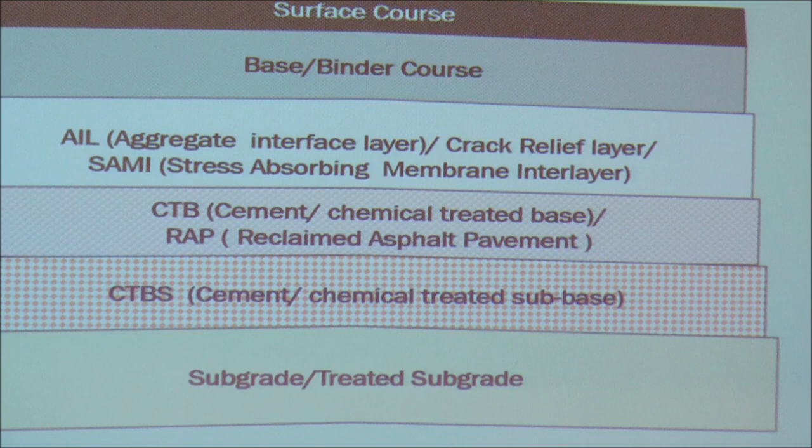So RAP, in the next program they will explain that RAP is very useful, and even IRC 37 have clarified where to use it and how to use it. Then comes the aggregate interface layer, crack relief layer, then is the base and binder course, then the surface course. So upper two courses are same, but in these upper two courses also, as Dr. Tanuj informed, they are using other materials also, which we will explain in the next slide.

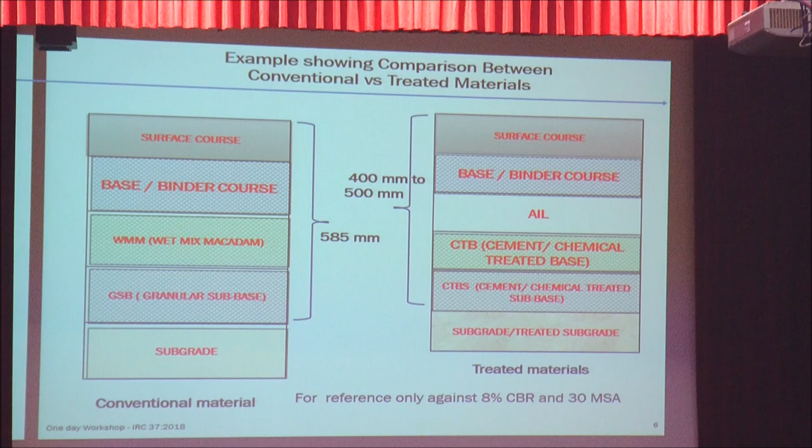So just for a reference purpose, in conventional pavement, considering a CBR value of 8% and designed for 30 MSA, almost the thickness used to come to 585 mm. But when you go with this treated sub-base, which we call smart pavements, this thickness can come to 400 to 500 mm.

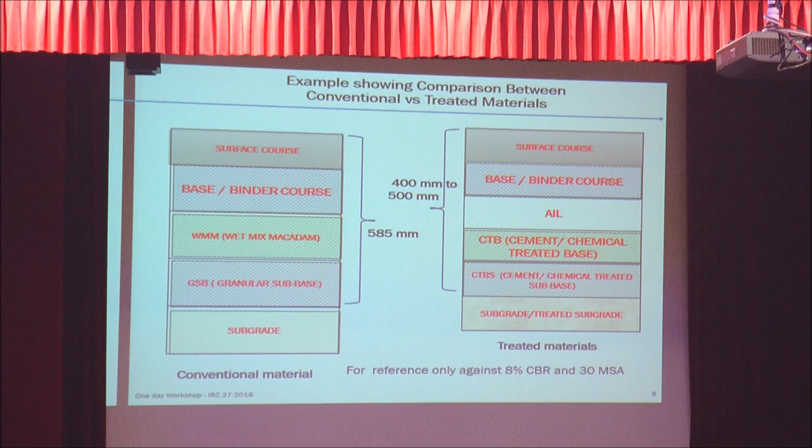So I explained the different layers. Layer 0 is embankment, it is natural existing surface filled up material. Either you have the existing ground, if the ground is lower, we create the embankment, then we do the filling - that is the filled up material.

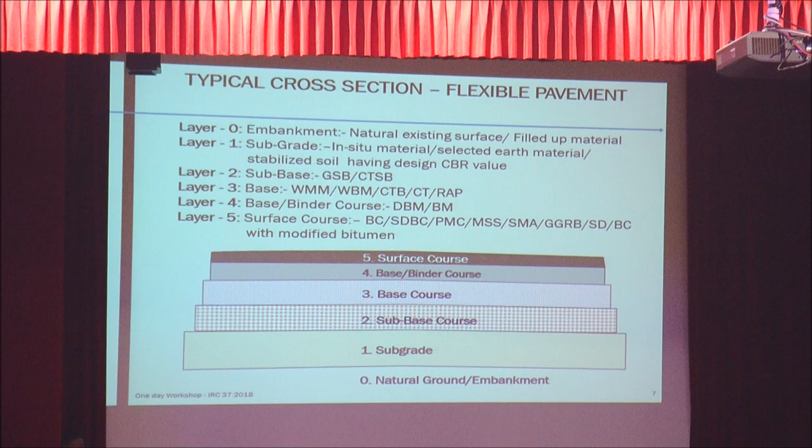Second layer comes subgrade, it is in situ material, selected earth material, stabilized soil. If the level permits you, you need not import the earth. You can use that layer itself as a subgrade, but you will have to bring it to the design parameters of CBR to that soil.

Next layer is sub-base. In conventional base, it is GSB. If you treat it, it then becomes cement treated sub-base. Third layer is wet mix, the waterbound macadam, cement treated base, CT or RAP. These are the basic words which will be used very frequently in the next presentation.

That is why I am explaining that these are the words which will be used in the base course. Then binder course is DBM and BM. In our fifth revision, they have removed BM, but I think they are again going to introduce BM. Then the surface course is BC, SDBC, PMC, MSS, SMA, GGRB, SD or BC. These are the words which will be used by them.

Bituminous concrete, semi-dense bituminous course, mixed seal surfacing, stone matrix asphalt, gap graded rubberized bitumen, semi-dense bitumen and bituminous concrete.

So first layer we discussed, it was the embankment. It is a natural ground filled up soil on which subsequent pavement layers are placed. So if the level permits, it can be natural ground also. If you are to raise the level, then you have to import the material - that is the embankment.

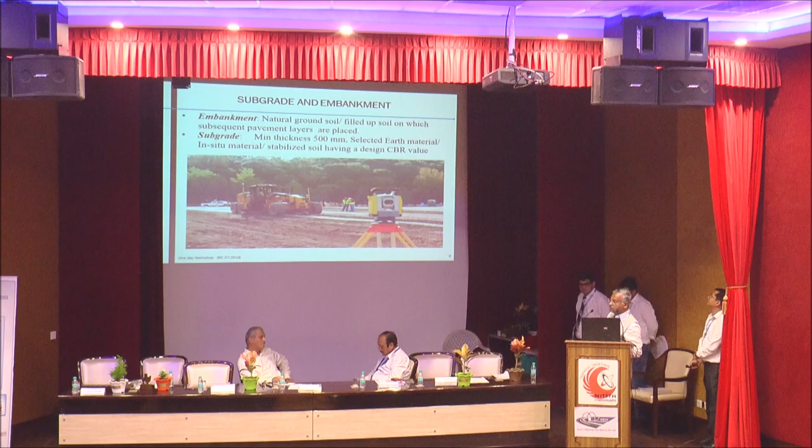Then comes the subgrade. As I already informed, the minimum thickness required for subgrade is 500 mm. If the level permits, you can use the existing ground itself. You are to loosen it and recompact it to bring it to the designed CBR value. Or otherwise, you have to import the earth of the design CBR value. So subgrade has a design CBR value.

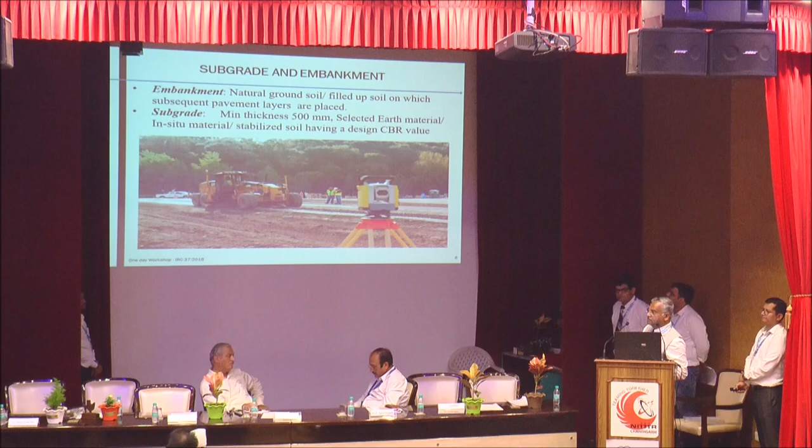Then comes the granular subbase. In granular subbase...

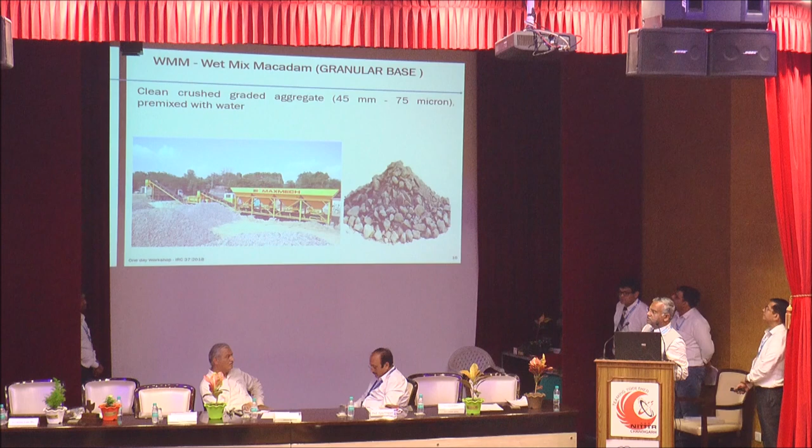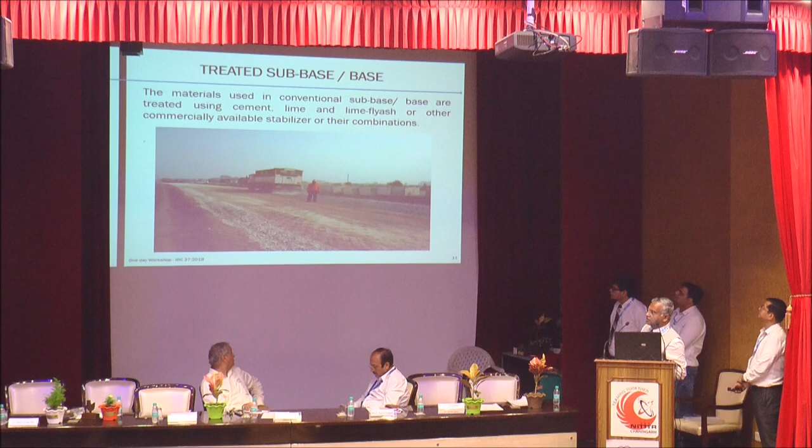Then bituminous layer, DBM, dense bituminous macadam. BM is bituminous macadam. It is allowed up to traffic of 20 MSA only.

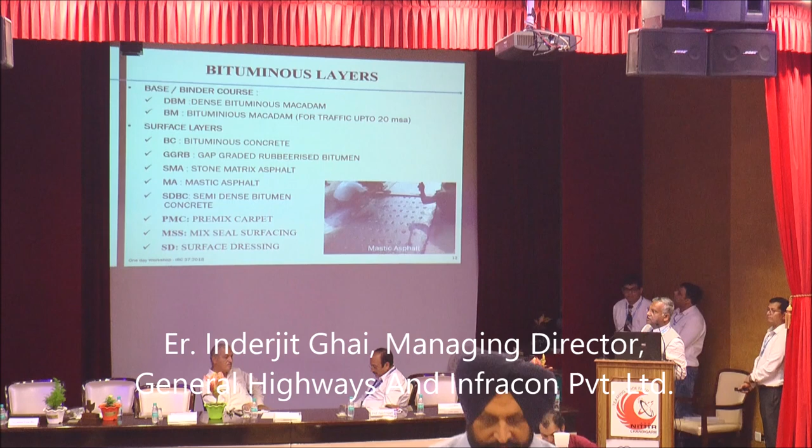Surface course are BC - bituminous concrete, GGRB - gap graded rubberized bitumen, SMA stands for stone matrix asphalt, MA for mastic asphalt, SDBC semi-dense bituminous concrete. PMC stands for pre-mixed carpet, MSS for mix seal surfacing, SD for surface dressing.

Most of these layers have been used by most of the engineers present over here.

Then reclaimed asphalt pavement. As I told you, this is a new concept, but since last 5-6 years it is used very frequently on almost all highways. This is a machine - with this machine they reclaim the old asphalt. Then the old asphalt material is used either in wet mix macadam or in bituminous layers also.

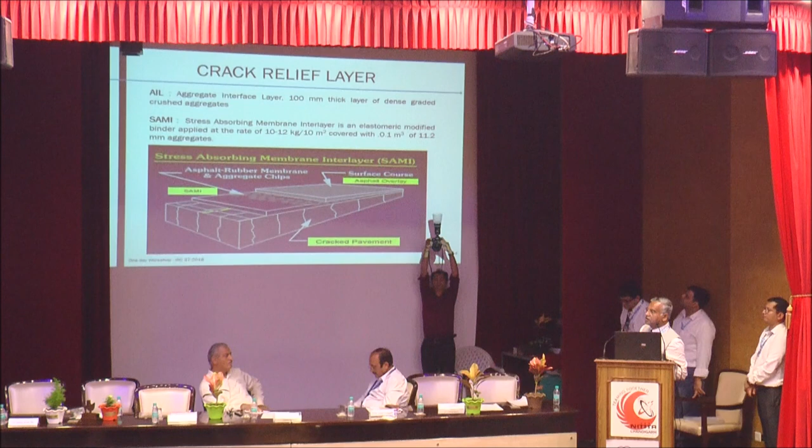Then one layer was crack relief layer. When you use smart pavements, there is the necessity of this crack relief layer, which can be either a layer of aggregate or it can be a stress absorbing membrane interlayer which we call SAMI.

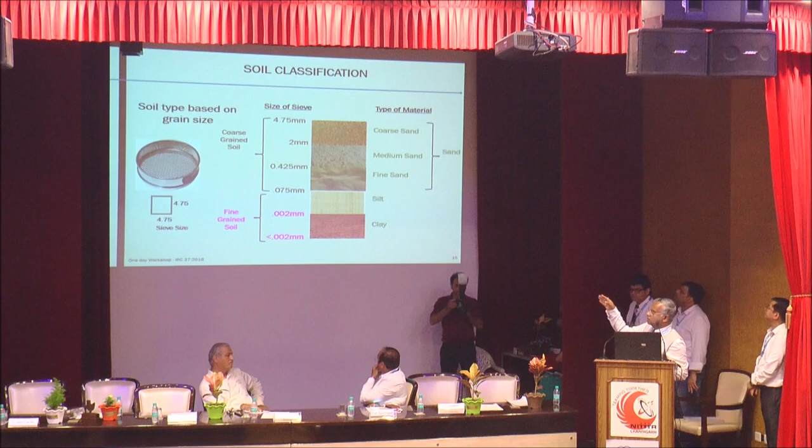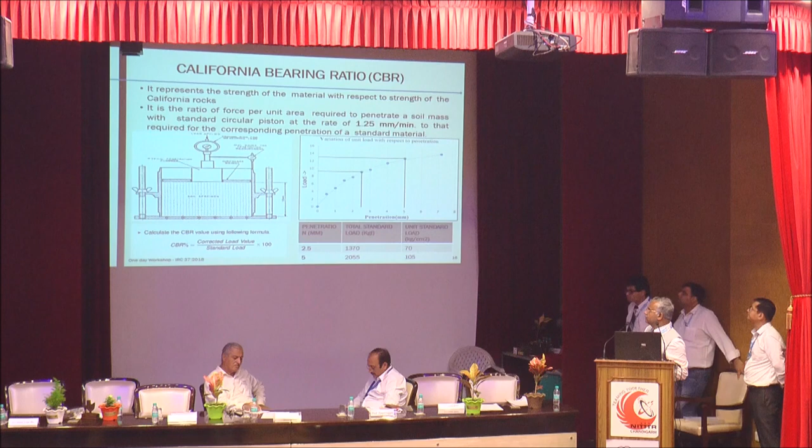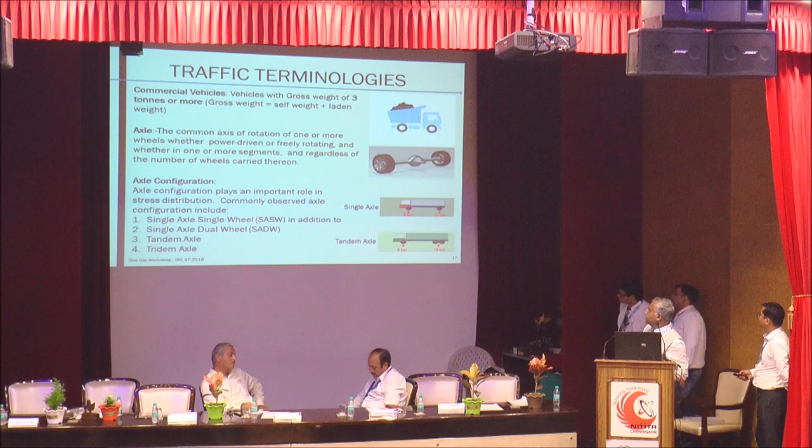Other words used are axle, single axle, dual axle, and axle load. We have tried to explain axle in this picture. Generally structural design of pavement is carried out for vehicles having load of more than 3 tons. It is sometimes confused that this 3 ton is only the load added in the truck or tipper, but actually this 3 ton includes the weight of the vehicle also. Every vehicle has 2 axles, one front axle and one rear axle. On the rear axle we have single axle, dual wheel, tandem axle, and tridem axle. These are photographs showing single axle, tandem axle, and tridem axle.

In the latest IRC journal, the editor published that if a vehicle having single axle, meaning one front axle and one rear axle, has a total weight of 25 ton, approximately 6 ton comes on the front wheel and 19 ton goes to the rear wheel, the vehicle damage factor is 30 ESA. If the same load is carried by a vehicle having tandem axle, this VDF goes down to 3.2. Now we can imagine how much damage is caused by overloading, it is almost 10 times. Even increasing the axle in that vehicle reduces the vehicle damage factor by 10 times.

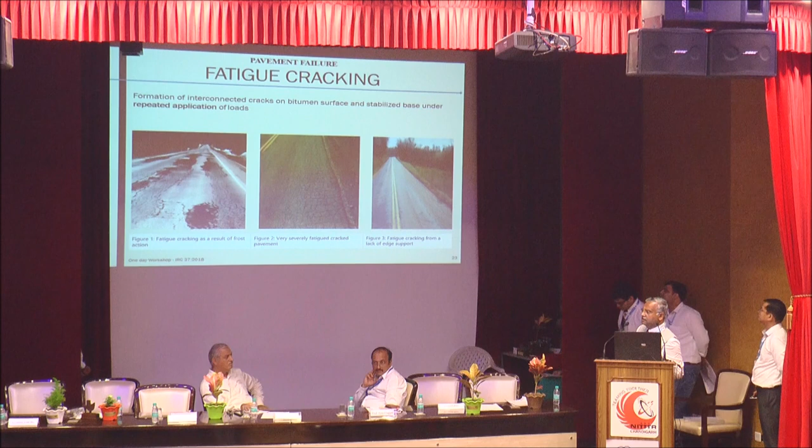So in fatigue, they will use the word top down cracking or bottom up cracking. If the crack is traveling from top to bottom, it's top down cracking. If it's going from bottom to up, it's bottom up cracking.

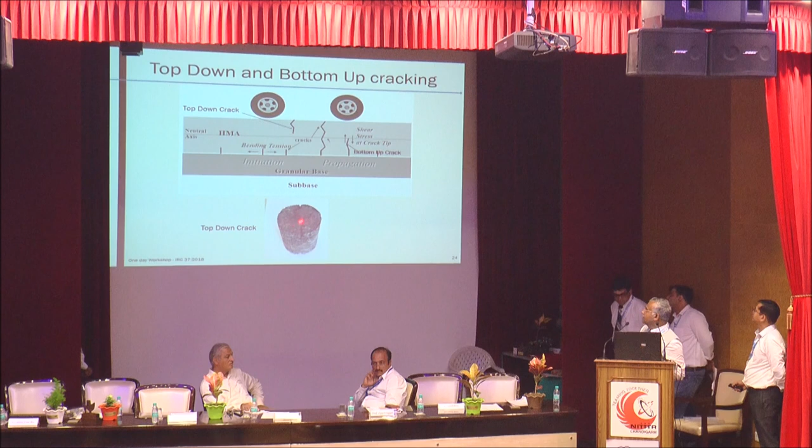Then another word that will be used a lot is modulus of resilience. We have all studied modulus of elasticity, everybody knows stress over strain. Stress is force over area, strain is change in length over original length, and modulus of elasticity is stress over strain. Whereas modulus of resilience is almost like modulus of elasticity, but it is stress divided by strain for a rapidly applied load.

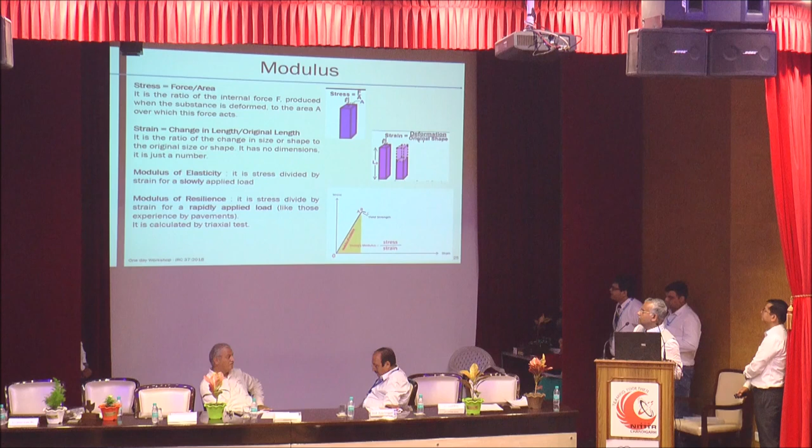Dr. Bose and Mr. Jha will explain it in detail. So generally we get confused about the difference between modulus of elasticity and modulus of resilience. Modulus of resilience is stress divided by strain, but for a rapidly applied load as considered in highways and pavements, and it is calculated by triaxial test.

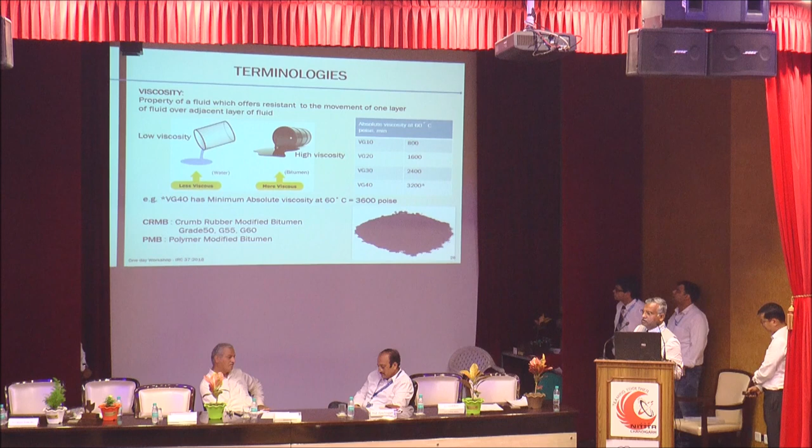Then there is polymer modified bitumen. There are so many chemicals about which I am not an expert and not very much aware. They add these chemicals and it becomes polymer modified bitumen. But all these specifications have been given in our codes now.

Then the word they will use is Poisson ratio. Through the slide show, we have tried to explain the Poisson ratio, mu. The value as per code is restricted to 0.35 for subgrade, untreated sub-base, base and bituminous layers, and 0.25 for treated sub-base and base layers.

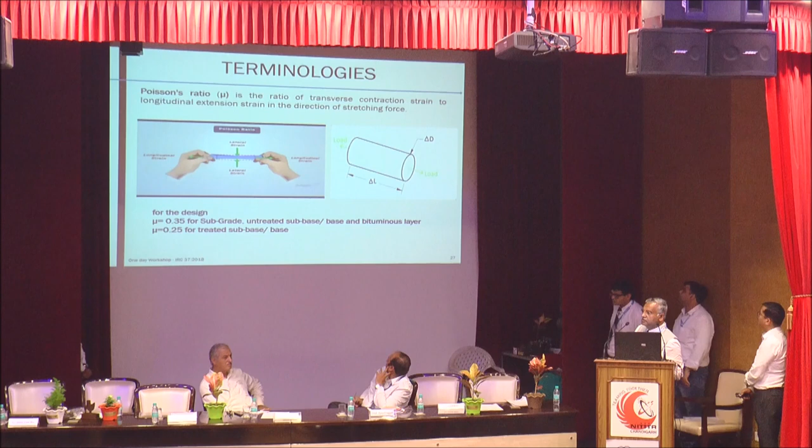So this was ABCD of IRC 37. I got motivated for this ABCD, there was a movie, ABCD, Anybody Can Dance. But now our mission is ABCDE, awareness between civil degree diploma engineers, for which we are conducting this workshop, and we will put our best efforts to continue these workshops in future also. Thank you.